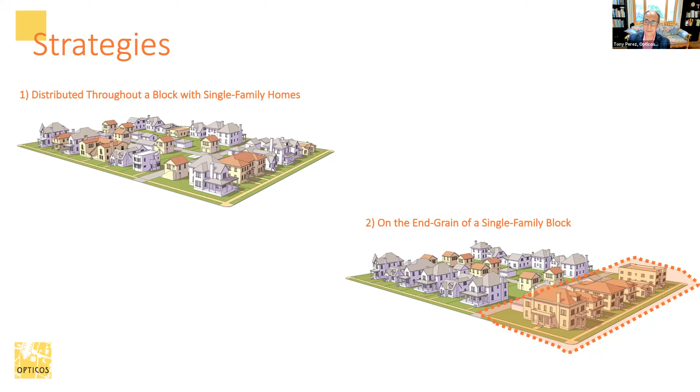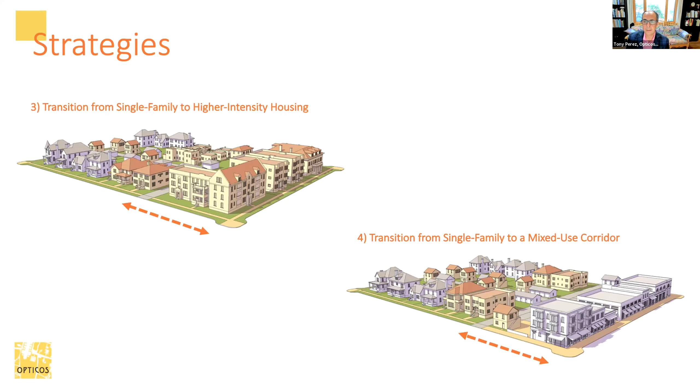The developer is an apartment developer, and he came to Dan and said, I'm really interested in doing this. I'm an apartment developer, I do these things all the time, but I don't want to do any corridors or elevators, and I'm very interested in the missing middle because of that. So all these buildings have, as the developer puts it, 100% net leasable area. There's nothing wasted—no lobby, no elevator, none of that, no corridors. You walk to your unit, you open the door, you go in. That was a big key for this developer.

This is, I want to say, 50 or 60 acres with about 540 units on it, and it's about a third of the way through under construction. I think the developer calls it on the website Urban Waters. If you can't find it by this name, we call it Prairie Queen—that was the original name of the project. But if you can't find that, look for Urban Waters.

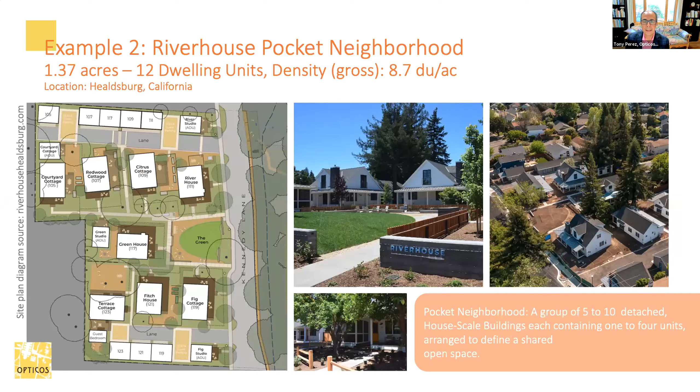Then here's a project along the lines of the Clarkston cottages. This is in Northern California, and it's a cottage court or pocket neighborhood—it could be called either. It's basically small cottages, again that one story with that occupied attic that provides a partial second floor without a second floor overpowering that whole green. All the buildings are arranged around that green, a beautiful little house-scale project, both of these. You can see the townhouses in the middle there, and then all these other buildings around. They're all aimed at that house scale size.

It's really about the lot width and the lot depth and the number of units you're going to put on it, the number of parking spaces, does it fit in the neighborhood? All those things are way more important than density.

For those communities that don't use density, you might say, well, that doesn't apply to me, Tony, why are you talking about it? Across the country, a lot of zoning codes actually use something equivalent to density, but phrased as minimum lot area per family or minimum lot area per unit. It's the same thing. I'm not saying you're doing something wrong, but that metric, that way of regulating development, isn't very productive or efficient. It also doesn't give the public any understanding about what the form could be.

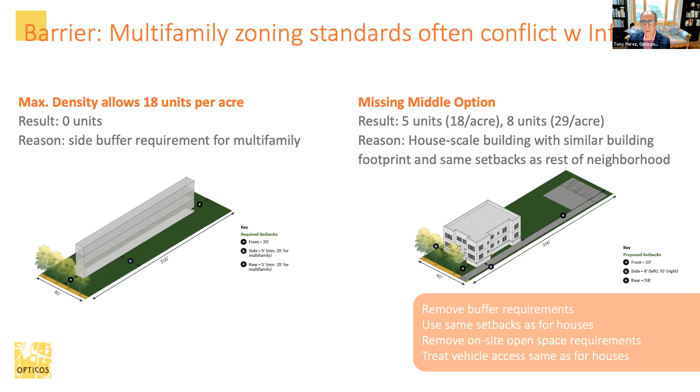Minimum unit size requirements—another barrier. People have a lot of good intentions for regulating unit size, but at the end of the day, the smaller the unit, the more affordable it's going to be just by math alone. It's also going to appeal to people that don't want big units.

And then the last barrier is on parking. Parking's huge.

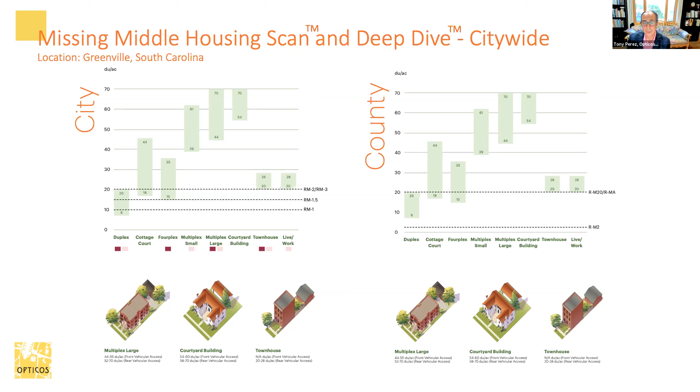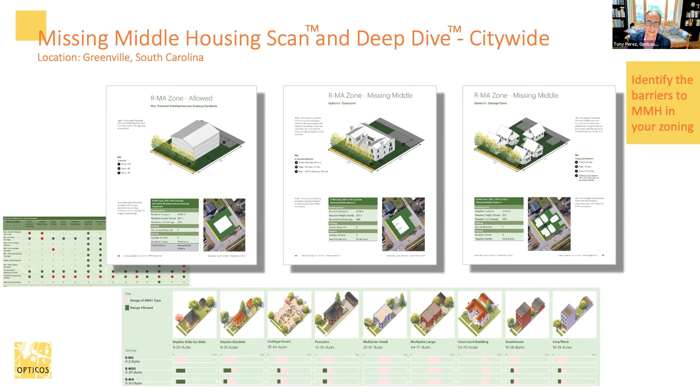This is a chart from Greenville where we did that very thing. We were asked to look at this, and we did a scan of their policies and regulations and came up with those barriers. Then we worked with them on testing what would fit on their lots where they want to achieve missing middle housing. We came up with 30, 40 different scenarios and recommendations and wrote a very graphic report for them. Right now they're starting a code rewrite process to implement this and a lot of other things they're working on. And the last few things here are examples of implementation.

And then a few strategies about how to actually go about changing your standards and executing this. So you might be one of those places or towns that say, well, this sounds good, but we don't have the ability to hire anybody to do this. We think we've got the answers—this is great feedback, we'll go back and do our own testing, we'll figure it out. And so that's great. I just want to show you this example as a way to do that.

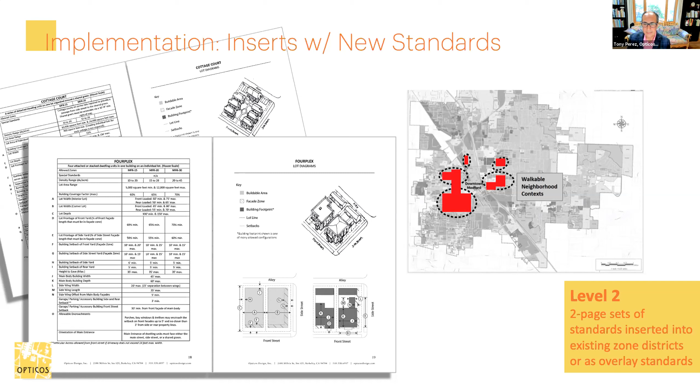They override them in those areas. That's another way. A third of four examples I want to show you is this one, which replaces the zoning with a form-based zoning code for this little area in Novato, California.

This approach says the R20 zone in this case doesn't allow 20 units to the acre as it's supposed to by the comp plan. The comprehensive plan says you're supposed to allow 20 units to the acre in this area, and it isn't. So we wrote a new zoning code with form-based standards to show the missing middle types would be allowed there.

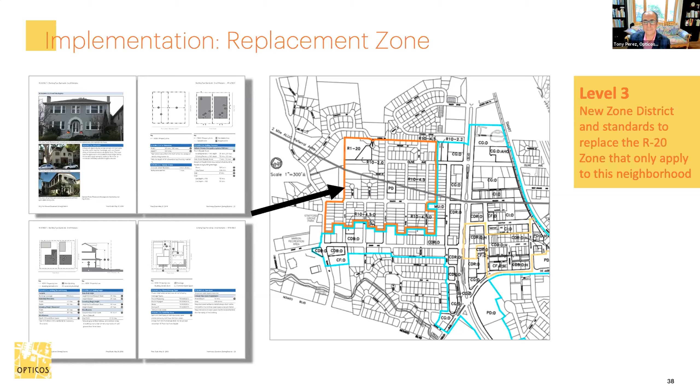And then the last example is what we call in California objective design standards. The state has given a lot of mandates recently, and one of them is that for certain types of affordable housing meeting the state's criteria, cities can only apply standards that are objective, not subjective. So if a standard requires a meeting with somebody to figure out what it is or what it'll be on their project, that's not objective.

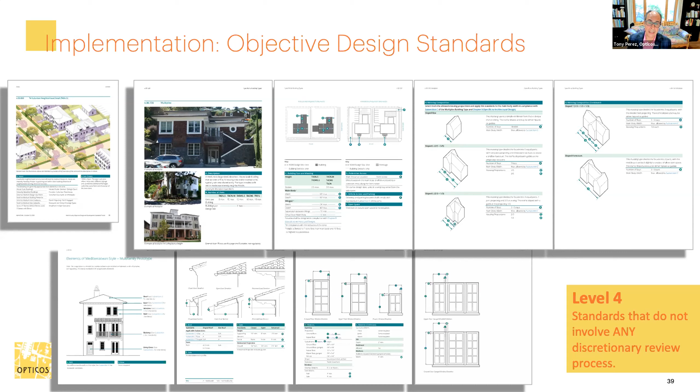So the state has said you have to apply what's only objective. A lot of cities are preparing them, and we were hired by Marin County, north of San Francisco, and 10 towns in that county, to prepare objective standards. This is a more robust set of standards because, as they said, if we can't apply discretionary review or have meetings with people to review what they're proposing, then we've got to put our standards down on paper. That's why these are more detailed than the other examples.

This is Marin County and those towns. It's a really important case study because they organized themselves as one client to work with us. Instead of working with 11 different jurisdictions separately, we worked with all 11 planning directors, who communicated with their communities and councils, and we prepared a toolkit.

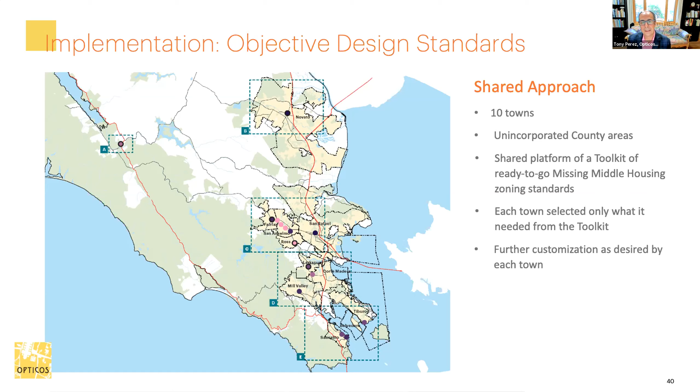From that toolkit that worked for all 11 jurisdictions, they then separated and went their own ways, pulling out what they needed to customize further for themselves. That was a really efficient way to take care of 11 jurisdictions at one time. We were really happy working on that, and it's nearing the adoption phase for many of these jurisdictions right now. So thank you very much. I appreciate the time to talk to you about this and give you an overview of this exciting subject, and I look forward to your questions.

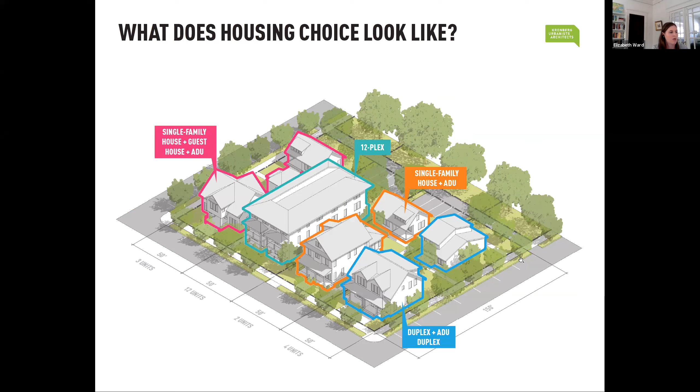It's really made up of smaller units, parking light. This is very important. In this diagram, you'll notice the parking is rear loaded off of an alley, which is a really efficient, effective way to provide parking, or on street, which we like to promote as an existing resource that's available in walkable and mobility rich areas. Very important, and it maintains existing character at that house scale you've been hearing a lot about.

So housing choice really looks like places that you already know and love. We've seen a lot of examples across Georgia today. These are some examples from Rome, Georgia, a couple blocks off of Broad Street, one of their main streets.

We see an example here of a detached accessory dwelling unit, a small living unit above a garage, a duplex. You can see it's got the two front doors sitting right next to a single family home, same size and scale. A small apartment also sitting by a single family home, same size and scale. And a quadplex that looks like a single family home but has 4 units.

And then we see these in our very small town, Cedartown, Georgia. Again, a side-by-side duplex and an up-down duplex here. And in some of our slightly larger places as well, like Brunswick, Georgia. This again looks like a single family home, but you can see here, 5 mailboxes out front.

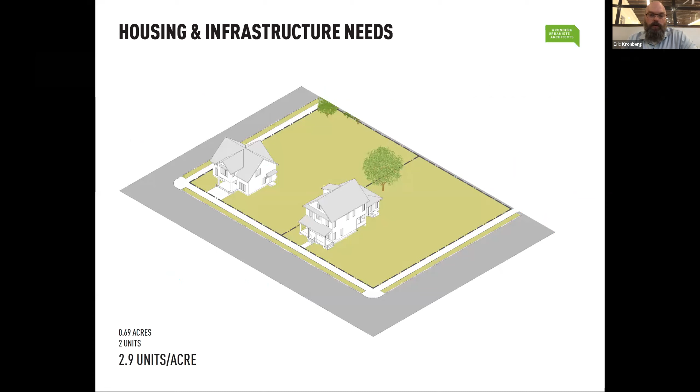These are two larger format single family houses, this is all to scale. Both of these are shown as a 100 by 150 foot deep lot, so that's a 15,000 square foot lot. For those of you that know your own zoning, you can start to translate to your districts from a code standpoint. But before we talk about all the infrastructure, we want to talk about how these large format homes help and meet the needs of a population or not.

One of the things that was really powerful - we were presenting with a friend from Central Michigan a couple months ago. One of the things she pointed out in her town, and this is true in so many places, is that she did an infill renovation on their main street to provide some condos, which were snapped up by empty nesters. What was really transformational for her town is they realized all those people that moved into this condo project on Main Street were leaving larger format houses, and families that were trying to buy a house or start a family couldn't afford to buy a house in town because there wasn't enough housing.

Seniors were trapped in their housing because they had nowhere else to go. The aging senior here, he's okay, but doesn't need a 4 or 5 bedroom house, but that's the option he has. He sees no better choice in this town. He's basically hoarding housing that other people need, but because he has no choices, none of these other folks have a place to move into, assuming they want a larger single family home. But if you're a single senior aging, you don't need this - a young graduate doesn't need this, roommates maybe don't need it. These housing options, even if they were available, aren't meeting the needs of so many of our citizens.

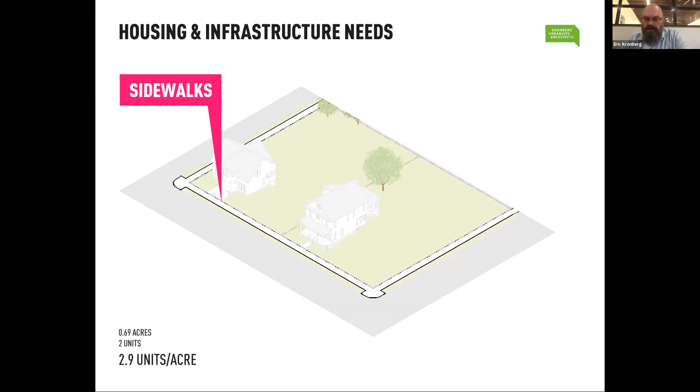But when you talk about pivoting these same houses back to infrastructure, you start to look at all the stuff that from an infrastructure standpoint is needed to support these lots. Ideally you live in a place that has sidewalks - those are not cheap. There's also curbs that help define the street from the privacy area. You've got, maybe if you're lucky, street trees for a better streetscape.

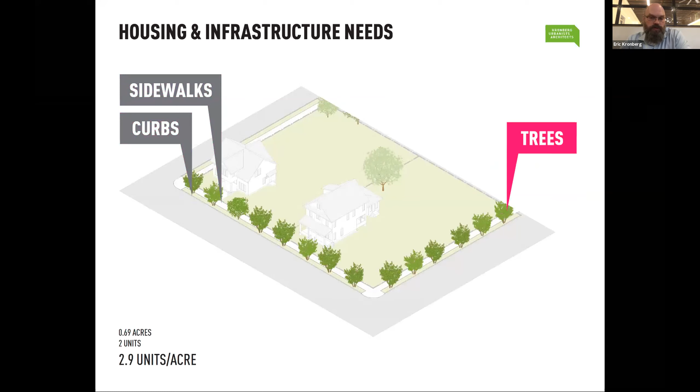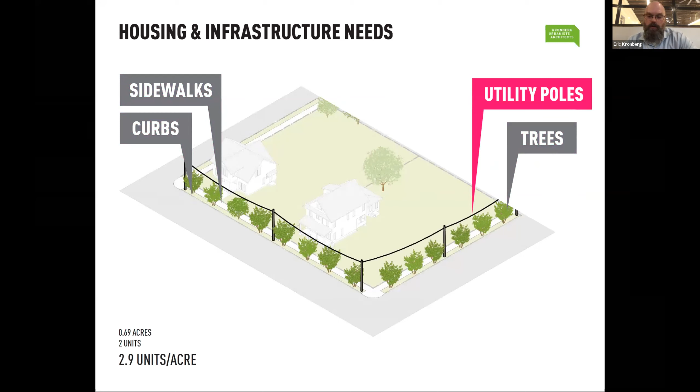You've got utility poles, and I know a lot of people think utilities are not a cost to municipality. Obviously in Georgia, there's a lot of cities that have their own utilities. Regardless, there's a cost to the residents in terms of the cost of infrastructure to provide that power that is packed into their bill one way or the other.

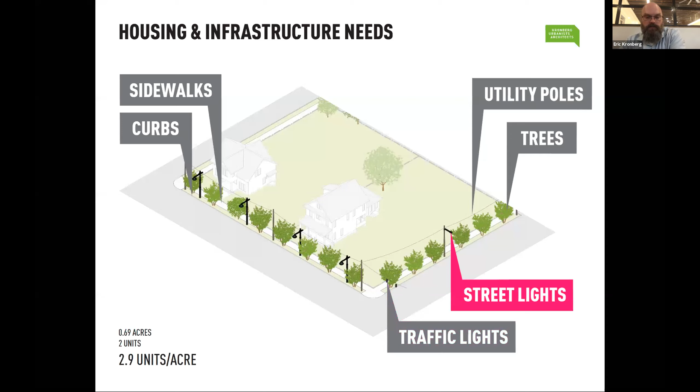We have traffic and traffic lights, and these are ongoing maintenance costs. We also have street lights, if you're lucky, to have a safe walking environment in the evening. And then you shift to the underground stuff, right?

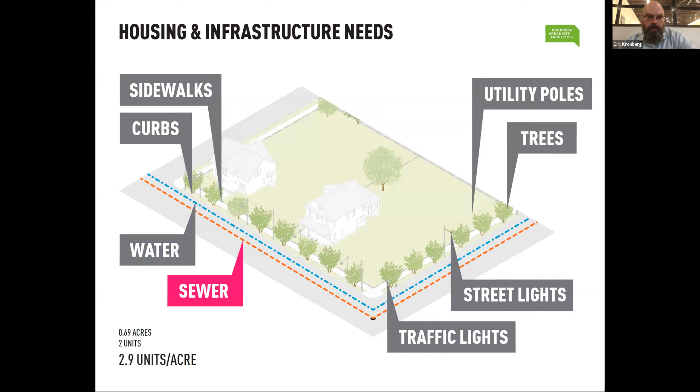The stuff that's out of sight, out of mind. We've got all our water lines to maintain, all our sewer lines to maintain on top of that. You may have underground stormwater systems, and you have runoff depending on the amount of asphalt you have.

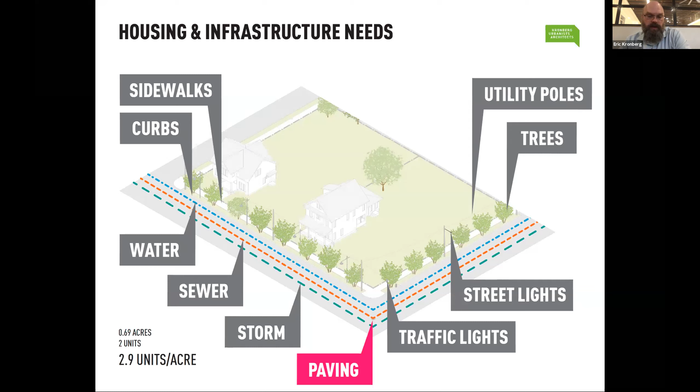These are all expensive things to maintain. And then lastly, all the asphalt that also needs to be maintained. Generally speaking, this underground infrastructure, depending on how well it's built, has between sometimes a 30 to maybe a 50-year life cycle if it's built well. When you think about a suburban expansion in our places, most of the stuff was put in the ground 30 to 50, maybe 60 years ago. Does your city have a capital account to replace all this stuff as it's failing?

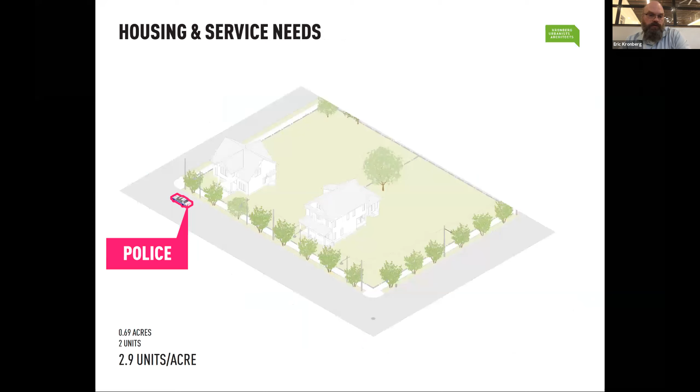Probably not, or not enough. And so when we look at all this stuff, that's a lot. But on top of that, it's not just the physical - we also have to look at the services. There's police, property taxes paid for. There's also fire, schools, and trash and waste. This is a lot for two houses to support in terms of what helps keep them going.

So put all this together, it is a huge burden that not a lot of property taxes are covering. Often the property taxes barely cover the year-to-year costs, and there's no reserve being pulled out of them for the replacement costs of all the physical infrastructure.

So now, from an alternative standpoint - when we talk about housing choice and infill housing, we like to take those same lots and show, through smaller lot size, accessory dwelling units, two-family houses, we can provide a lot more housing choices in the same space with minimal additional infrastructure cost, often on the service sector side, maybe a little bit of underground improvements if the existing system is substandard and needs to be replaced anyways.

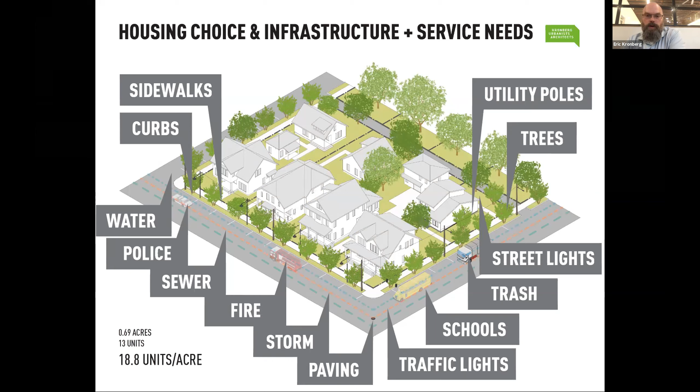But again, when you look at the difference of how much these two houses have to provide or cover from a service standpoint, infrastructure standpoint, versus this, there's not a lot of difference. But way more properties and property taxes being generated to support those services and infrastructure. We're using a lot of fancy acronyms here, which I'll take a moment to break down, but this is how you get 6.5 times the amount of housing in the same amount of land in a neighborhood scale walkable format.

When we say single family homes, duplexes, we know that's a bad word in some communities. We'll help give you some ways to talk about those differently. A DADU is a detached accessory dwelling unit - that is a guest cottage that is not attached to another structure. There's also such things as an attached ADU, which is either a basement apartment or back apartment that's attached to the primary house.

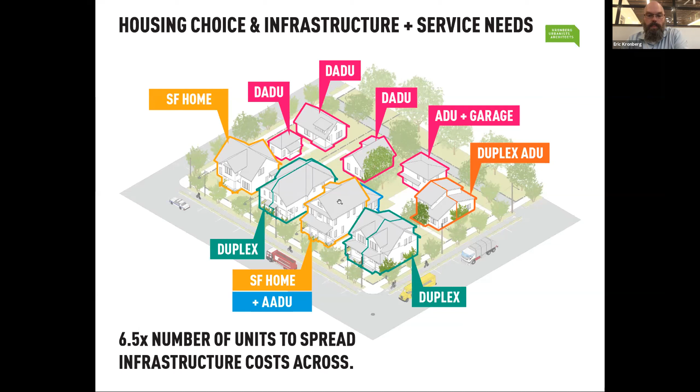And again, this is also how we start to have housing options in the same land for aging baby boomers that don't want to maintain a yard, a downsizing senior that still wants to be close to town, or a downsizing couple. You've got roommates that have a chance to rent a smaller place here. You've got a single parent that has maybe the opportunity to rent a larger house but have supplemental income. You've got choice after choice that fits into this, with these housing varieties and housing choices that start to better match our needs as a population.

And I also want to do a quick run through of some infrastructure analysis we did. We were part of the team that looked at, or working on, a unified development ordinance for both Troup County and LaGrange. So we looked at some infrastructure and housing options for Troup, and then also the Calumet neighborhood in LaGrange, which is very downtown adjacent.

We worked with Georgia Conservancy. They had looked at a parcel of land just under 7 acres in Calumet. We said, with this existing piece of land, if we take these housing examples that we're talking about that were being proposed as typologies in the zoning, what could we do? How much housing could we fit there without breaking a sweat, without trying too hard, but getting a variety of options? We keep some single family homes in, some have garages.

We did a cottage court, which I know Tony talked about as an option. We did a few 2-family homes. We're able to carve out a portion of land for green space or a park, and by that park we put a couple missing middle housing examples with some 8-plexes. We also proposed a new street and captured all those costs, had a lot of on-street parking, put in a new alley to park everything in the rear. We found that without working really hard, we were able to get 69 units of housing in 6.8 acres, right at about 10 units per acre.

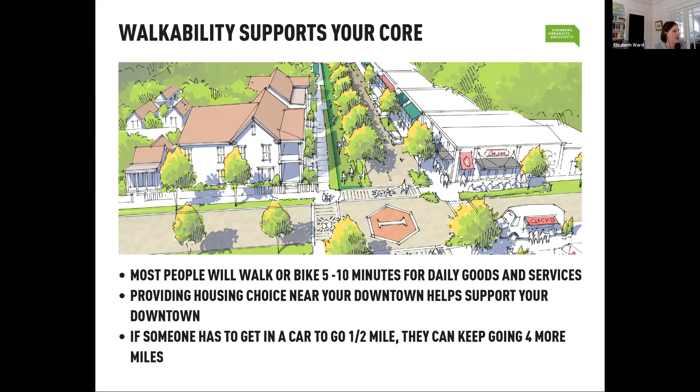A question that we like to ask, a great way to frame this, is: does your place, does your community allow enough people to live in walking distance to support your core?

So this is an example from Dallas, Georgia. We gave a talk there a couple of years ago and put this together to help talk through focusing on the core. Dallas is a typical size small town, and they've got a great historic downtown that has a typical commercial node of about 30,000 square feet of retail and commercial uses, plus or minus. We know that you need about 2,000 households to support 30,000 square feet of retail. So what does that look like?

We calculated the land area within these quarter mile and half mile walk sheds: 125 acres in a quarter mile, 500 acres within a half mile walk shed. We also know that public space takes up some of that, not all of that is developable land area. Typically public space takes up about 30% of land area, for streets, right of ways, parks, and things like that. So if we take that out, we're left with about 350 acres of developable land.

So if we take the 2,000 households that we know we need and divide that by the 350 acres we have within walking distance, that comes out to a little bit less than 6 households per acre needed within a half mile walk of your downtown or neighborhood core.

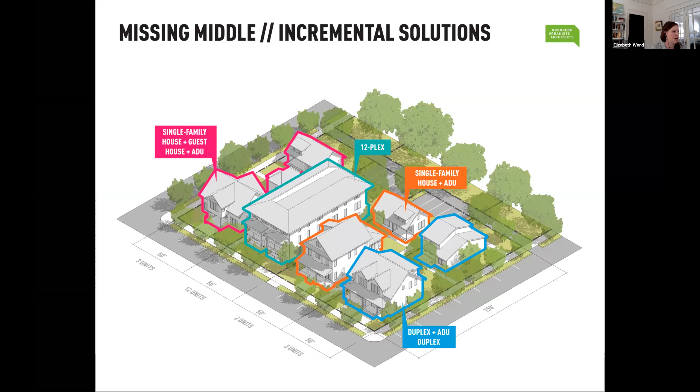So we've talked about what incremental and missing middle housing choice looks like at the neighborhood scale, traditional development patterns. One thing we like to point out is there is a difference within the missing middle spectrum of affordability and cost to build certain things, not just cost, but also difficulty.

So we really like to focus on IRC solutions. There are 2 types of building codes for residential: the IRC, which is the residential building code, and the IBC, which is the international building code. If you go to the next slide, we'll break that down a little bit.

IRC development includes the bottom end of the missing middle spectrum. So it includes things like single family homes, duplexes, accessory structures, and townhomes. And the IBC includes anything that has 3 units or more, so it's a multifamily category.

The reason that we like to promote IRC is because it makes things a lot simpler. The IRC does not require sprinklers, and that's not everywhere, but in the state of Georgia, that is true. The IRC typically has residential stormwater requirements rather than commercial stormwater requirements. That's not IRC, that's local jurisdiction, just to be clear. And then IRC has, and this again is local jurisdictions...

Typically, IRC projects have simpler permitting for both the buildings and the site versus commercial permitting requirements for multifamily buildings. Typically simpler engineering requirements, and typically IRC product is allowed as of right, so without needing a rezoning. So for a lot of reasons, we like to stick within this IRC category.

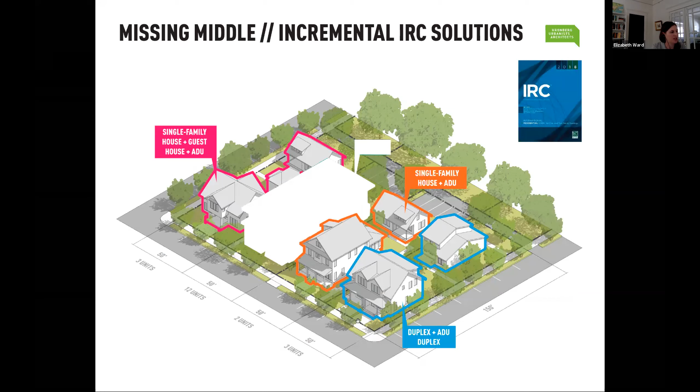So when we look back at that housing choice example, most of these building types fall within that IRC category. The only one that does not is the small scale apartment building, so you can see we've taken that out here.

And so Eric showed this slide earlier. We really like to call this super single family zoning. It's really the same scale and household sizes of what's allowed under existing single family zoning. It's just allowing more units.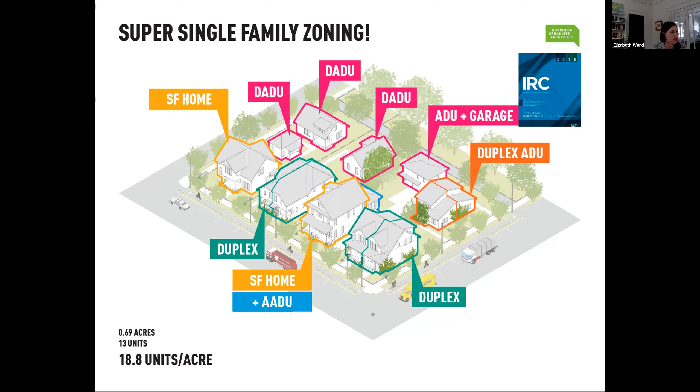And I want to spend just a second talking about accessory structures. We heard a lot about missing middle from a duplex up to some smaller scale apartments. Accessory structures are another key to housing choice options.

Eric's talked a little bit about ADUs, those are accessory dwelling units. These go by a lot of different names, might be a carriage house, a guest house, an in-law suite, and they can come in a lot of different forms. They can be detached, attached, they could be a basement apartment, they could be over a garage. But these really provide a lot of great flexibility when it comes to housing choice.

And then we also like to talk about something we call guest suites, which are kind of like a light version of an ADU. It's typically part of the main structure, so it's attached. And depending on your jurisdiction, these typically cannot have a full kitchen, which means they cannot have a stove. And sometimes an interior connection is required, so you might have a door here to say that this connects into the house. But these are just another flexible, light choice of housing choice.

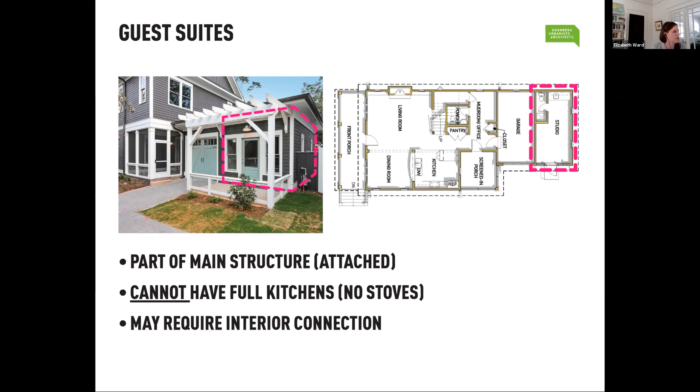And then we also like to talk about just small units, so small single family homes or cottages. There's so much need and demand, as we saw, for smaller housing. And we also heard that a lot of municipalities make it really difficult to build by having minimum home sizes. But we've seen in our built projects, there is a huge demand for when we provide small units like this. So this is a 1-bed, 1.5 bath home that's 650 square feet.

And just a floor plan example of that. So really simple, great for a starter home, great for a downsizing home.

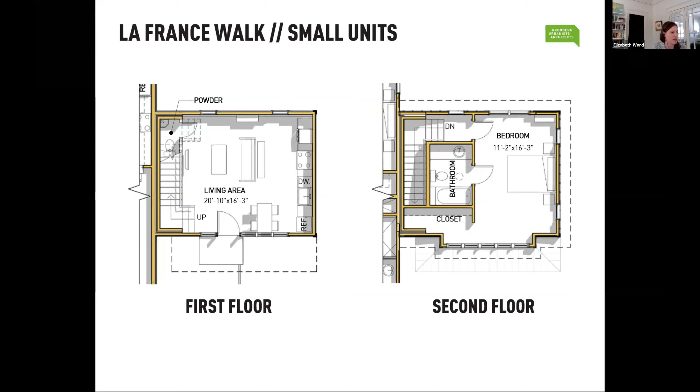So why aren't people building more of this? Why aren't we seeing more of this in our communities? We've heard a little bit about this. We really only build what we legally allow, so we have to make sure that we're making it allowable to build these things again. Simply put, we need to allow housing choice in our communities again.

And I'll let Eric talk through some specific ways we can make that happen. Absolutely, thank you Elizabeth. So there's all kinds of ways that you can start to reduce legislative barriers to providing these kinds of missing middle housing options in communities. And again, there's reasons we start with ADUs in so many ways. They tend to be the teddy bear, cuddly version of housing choices that are more appealing to communities that are not used to this stuff. So we'll talk about that.

But one of the first things we'll talk about is either removing or reducing residential parking requirements. And oftentimes, while removing is the thing you want to do, that can be hard. And so there's ways to reduce those as well to provide more flexibility. So anytime we can reduce minimum parking requirements for residential uses, it's a good thing.

Oftentimes, codes may say 2 to 3 parking spaces per dwelling unit. You're not going to be able to fit that, and you're not going to need that many parking spaces for so many of these uses, short of potentially student housing, which is its own tough animal, which we'll put a pin in for a minute.

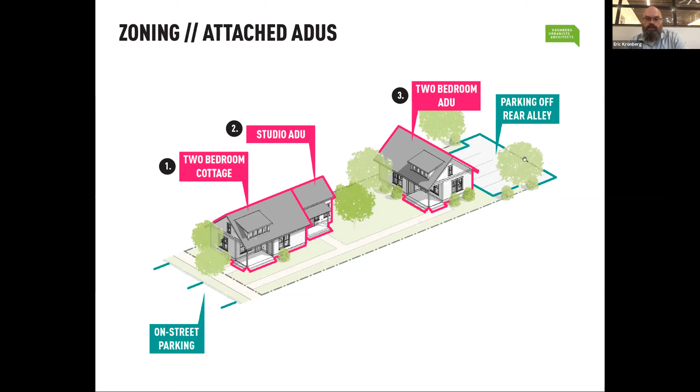Just to show you what this looks like playing out, you have your primary cottage or primary structure in the front. You have an attached studio ADU right here, an AADU for the fancy lingo. You'd have a detached ADU in the back, an accessory dwelling unit. So 3 units of housing. This is a 50 by 150 lot, with 7 parking spaces provided, 5 off the alley and 2 in front, for 3 units of housing, 6 bedrooms. This is what happens when you can align your on-street parking, leverage your alleys when you have them to get efficient parking in the rear, and provide great housing choices.

One of the things we want to point out from a policy standpoint is that our financial sector doesn't really understand ADUs nearly as well as they should. If you want to buy a new house in America, we've got government loan products that require 3 to 5% down. So if you want to buy a $500,000 house, you may only need $15,000 in equity. But if you have a house and want to put an accessory dwelling unit in the back that costs about $150,000, because they're not cheap since they're detached, you're going to need that cash. There's very few loan products that will finance that. Either it's cash on hand or you use the existing equity in your house through a home equity line of credit. Either way, they're relatively liquid assets. This is a huge barrier for so many folks hoping to provide more housing on their land.

So one of the things we've been talking about a lot lately is the need to allow fee simple ADUs. This means you should legally allow, as an option for the homeowner, the ability to plat off the back portion of their lot as its own parcel. This greatly simplifies finance because banks know how to lend on a single family house on its own land. They don't know how to lend on an accessory house that doesn't have clear title to the land that can be foreclosed, that's just how banking works. So allowing flag lots, or the rear half of corner lots, to be sold off separately really aligns financial systems and zoning with housing choices in our communities.

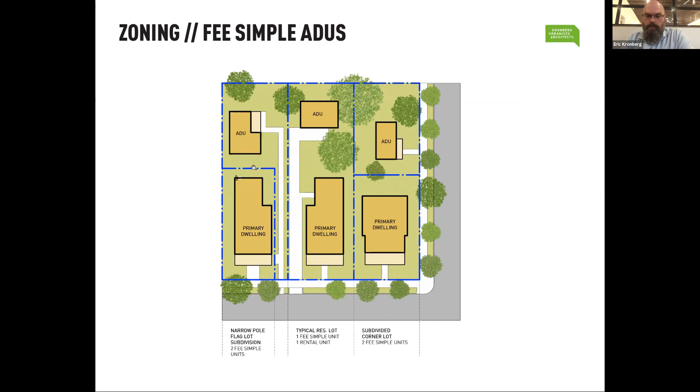And it's just a question of our zoning catching up to facilitate this lowest hanging fruit of housing being delivered in your communities. And this is what that can look like, from a 3-dimensional graphic of how this stuff can fit in a community compatible fashion.

Allowing ADUs to be platted fee simple is a critical way to increase our housing choices and provide more pathways for wealth creation through smaller home ownership. When we talk about how important it is for home ownership to start acquiring wealth and being invested in the community, we've got to provide ways for folks to get through the gateways to start owning homes sooner, which means smaller homes that are more attainable.

An example of this, we have a long case study on our website that we really recommend you go read. We're working with a nonprofit in an in-town transitioning Atlanta neighborhood, but the house prices, land price, and construction prices do translate well to other places. We assumed a very low land cost here because of the nature of this project, but we ran the development scenario to look at real costs for a 2-bedroom, 2-bath home that could fit on this lot that was originally allowed from a zoning perspective, and found with a really optimistic lens that this could probably be built and sold for about $350,000.

That's minimal profit for the builder, minimal profit for the realtor. Those costs are included, but nobody's getting rich on this deal. That's just the cost of providing a 1,200 square foot house in this situation.

But what we looked at was that there was a zoning change in the community holistically that said lots could get smaller and you could do accessory dwelling units. We ran this scenario, which was interesting and provided a lot more affordable options.

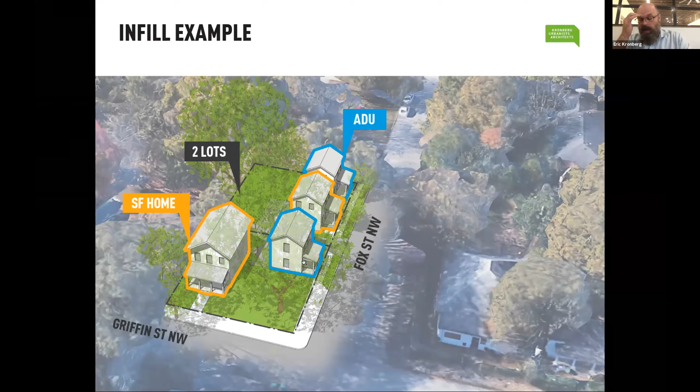We ended up going through a rezoning process with the city to show them that while we could build this legally, if we could do this and allow each house to be sold, it would greatly reduce the price point of this house because land costs and other costs were reduced. And it allowed us to create 4 smaller cottages at a much more attainable price point.

Now, these prices may shift and vary at your place. I'm not saying that these prices would hold directly, but proportionally, they should relate. Building a 600 square foot house is going to be way more cost effective to build and buy than a 3,000 square foot house when we're looking at housing attainability in a community.

And this lot that we're showing, I believe, is about 60 by 135 feet deep. This is not a large lot. It is a corner lot with great frontage options. And we were able to provide on-street parking and provide a handful of parking spaces off-street as well. This is called the Griffin Street case study.

We've got a lot of examples like this. We do a lot of math breakdowns on missing middle housing options to show how 4-plexes are super hard to build because they're super inefficient. 8 and 12 plexes get better in terms of housing sizes that make sense based on current building codes that we have to deal with, stormwater codes and development codes.

But when you want to look at a Griffin Street, the smaller option right here, this is the case study on our website. It's kronbergua.com, and this link will be shared with everybody to go if you want to do a deeper dive to see how this stuff plays out.

Elizabeth and I always struggle because there's so much information to download to folks, and we're trying to provide you the tip of the iceberg. So more and more in these presentations, we're giving you a reading list. Strong Towns is both a website and they've got several books out. They really hit home on this notion of suburban sprawl and infrastructure costs bankrupting cities. They've got some of the best writing out there. There's a brand new book out, Confessions of a Recovering Engineer. I'm looking forward to reading that one, but their work has been going on for over, I think, 12 or 13 years now.

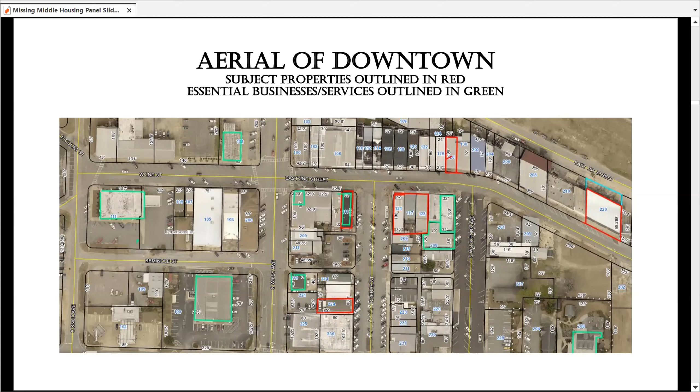We've had some discussion about what is affordable housing. What does that look like? Should we focus on affordable housing? And the bottom line is we really decided we need to start focusing on just increasing availability of housing at all price points.

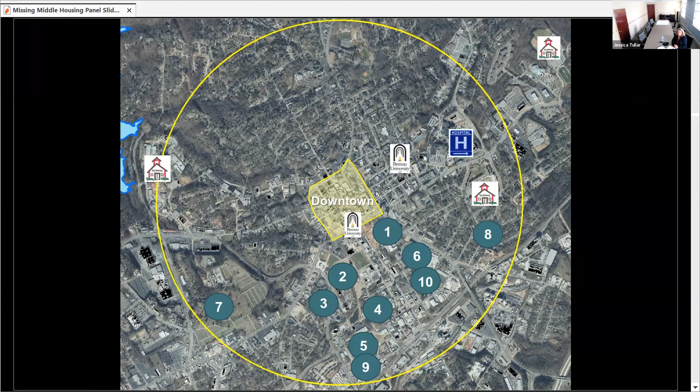So our first project that I wanted to highlight is a private development that has been a very interesting collaboration, 10 plus years in the making to get us to this point, but it's called Solis. It's going to have, in 2 phases, about 400 apartment units ranging from studio size up to 3-bedroom, 2-bath, and 615 to about 1,700 square feet. The target market for these apartments really is the hospital's residents.

We've now become a residency hospital, and that's continuing to increase in the number of participants. We also have our Brenau Downtown Center, which has the Allied Sciences and Health Sciences graduate program that sees more non-traditional graduate students - folks with income but needing a place to stay locally - and then also just married or single young professionals. So that is their target market, which for now, a lot of those folks are commuting in from either outside of the city within Hall County or outside the county altogether.

You can also see there's going to be a little bit of mixed retail. On the aerial, you can see it's just to the left of what's called Grove Street - that's that concrete trail there. That is our Highlands to Islands Trail Network, a countywide network we're all working on. That specific section is the Midland, and it is part of a very important north-south spine that will get folks from Lake Lanier all the way down to University of North Georgia at the Gainesville campus near Oakwood.

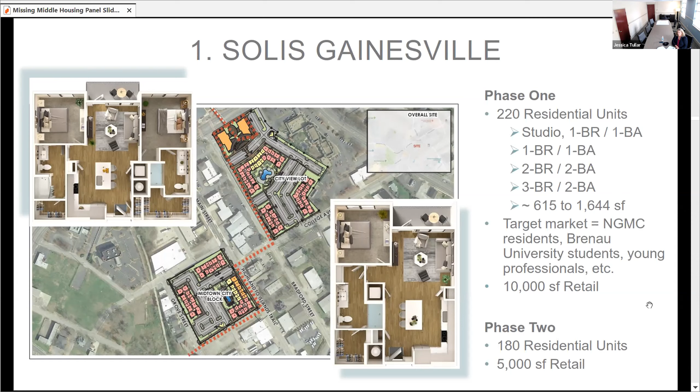This is actually the Solis project under construction, as you can see there. The front 2 pads are the retail and then the apartments behind. You'll see there a pedestrian bridge that spans one of our busiest arterial roadways, the Jesse Jewell Parkway. We have about 40,000 trips a day on that road, and the pedestrian bridge actually crosses over to our city administration building and our downtown square, so very walkable.

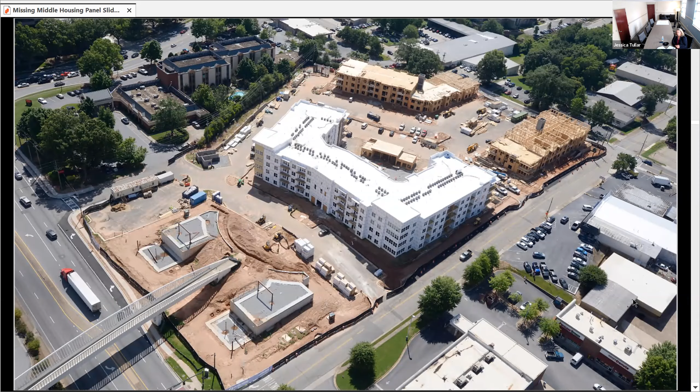Another project that is new is the Gainesville Midland project.

It's just recently received approval from our mayor and council and is going to be going forward with permitting over the next few months, and it's going to add another 200 units here in our Midland redevelopment area, which is just on the other side of our central business district.

You can see there our Greenway Public Safety Building. But this again is targeting those hospital residents, those young married and single professionals. And as I said a while ago, it does have direct access to our Highlands to Islands Trail Network and then the Midland Park.

What's really exciting about these two projects that I just mentioned is it has taken Gainesville into a new direction, or a different direction, in terms of density. Up until this point, we've really just focused on allowing up to 12 dwelling units per acre in our most dense residential classification, but both of these take us well beyond that, and it was actually well received by the community.

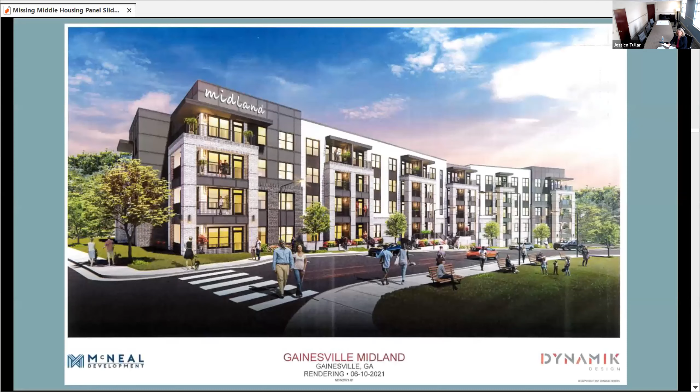So the other part of what we've recognized is here in Gainesville, unlike some towns that you would think would be high rental, we actually have a higher percentage of rental units than we do owner-occupied units. So a good bit of that is not just our garden style apartment complexes when you think of multifamily, but also a lot of single family houses that are owned by a handful of landlords, and they rent out to multiple families.

A few years ago, we took our mayor and council on a little field trip around the city to identify some of the less than ideal housing conditions throughout the city. And at that point, it was determined that we as a city needed to address the quality of housing, the living conditions of existing rental, because it was not fair for all residents not to have access to safe, decent housing. So since 2017, we've been taking a very deliberate, intentional, coordinated approach to addressing such issues as tenant-based and owner-based violations.

Over the last few years, we have inspected over 1,000 properties. We've issued over 2,000 violation letters, but have only issued one citation, meaning only one time have we actually had to go to court on this. For the most part, folks, we help them understand what is the violation, whether it's a tenant-based or owner-based violation, then give them an opportunity to address it. Generally speaking, they have been quick to respond. We've had a few instances where they weren't so happy, but ultimately they recognized that it was the right thing to do.

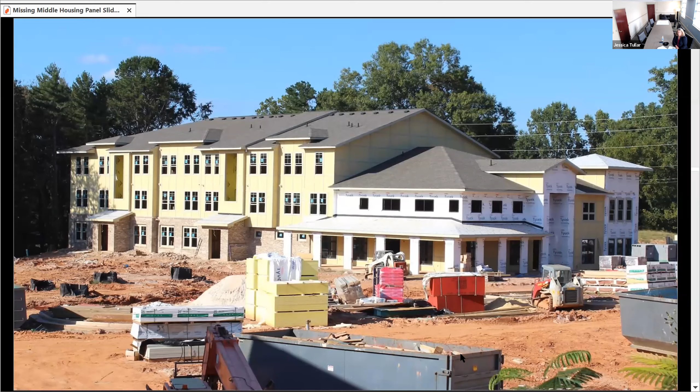The other side of this is, as I mentioned earlier, we are heavily more rental versus home ownership. So we the city have been working in partnership with our nonprofit development foundation to create housing home ownership opportunities.

We were able to build a total of 4 together and then 1 across the street for 5 in the area, 3 bedroom, 2 bath homes that were then marketed to first time home buyers. These homes are on the southeast side of downtown, but still within walking distance of great amenities and downtown. These are all occupied right now.

Most recently, we developed an additional 5 homes here that are 3 bedroom, 2 bath, a little bit on the smaller side, but we tried to fit into the historic development patterns there. The sales price was $150,000. We had over 25 applications submitted that we had to go through and qualify.

This was a little bit different in that we have shared driveways, much like the Hartwell example, something new. But it is a block and a half away from Midland Park as well as a skate park, 3 blocks away from the skate park, and has direct access to the Highlands to Islands Trail. So it's a pretty exciting opportunity.

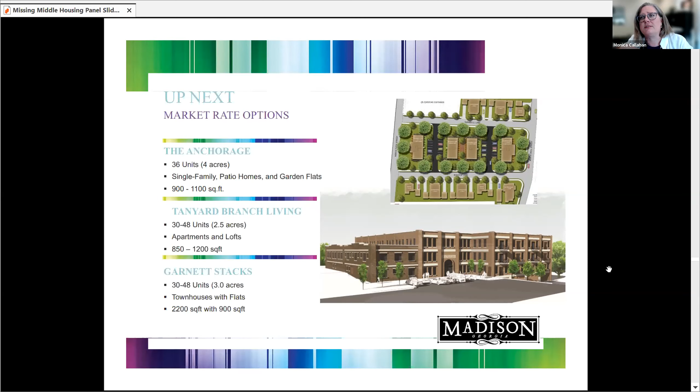Ro, would you go back one, please? Would you mind? Okay, so I used the picture — no, you were right, I used the picture, but it has some other comments on it.

We're moving toward trying to get some mid-size models. Everybody either wants to do a LIHTC, low-income housing tax credit project that's 48 to 60 units, or they want to do a duplex or a quadplex. We're really trying to identify and put out some models — I saw some great things today, so I'm excited about that — for some 8 to 10 unit complexes, some pocket neighborhoods, some pods, which are courtyard developments as someone described earlier. The last are planned ADUs instead of incorporating them into an already built environment — this would be planning for new construction with an accessory unit at the same time. You can go 2 slides forward.

Thank you. All right, that's all from me. My contact information is below, and I just wanted to share that we're excited to be here with y'all, and I've learned things already today. Thanks.

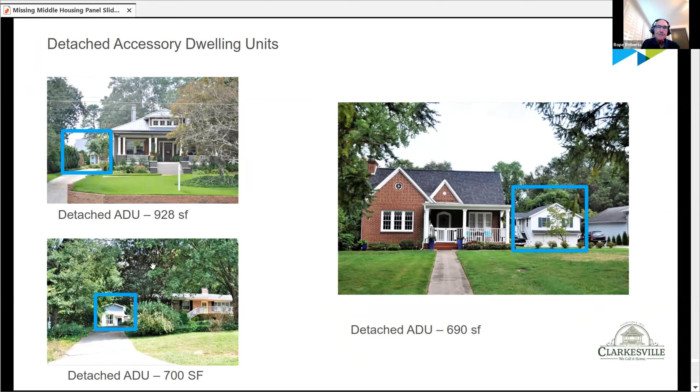And this is the subdivision which I live right up here. I love these. I remember when they were built, and I walked in and talked to the owner—1 bathroom, 1 bedroom, just a cute little square box.